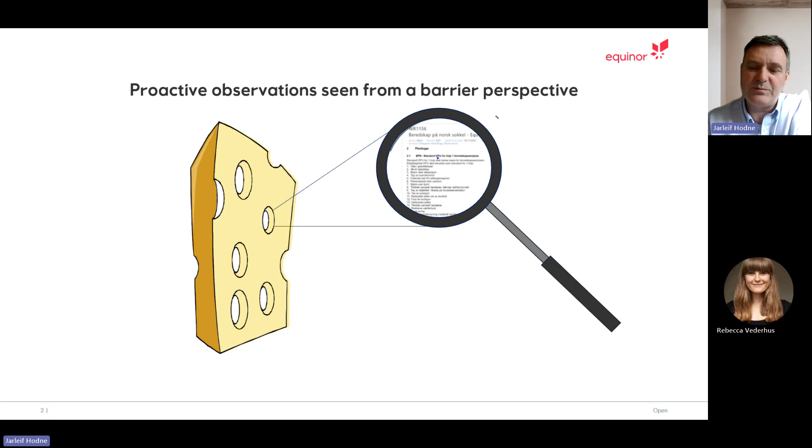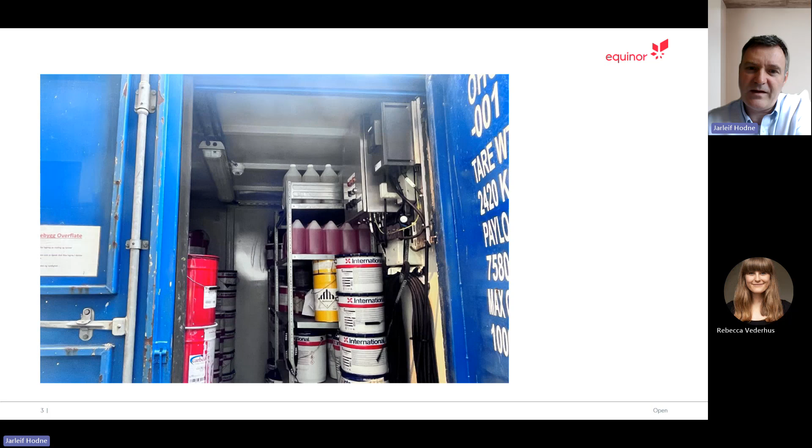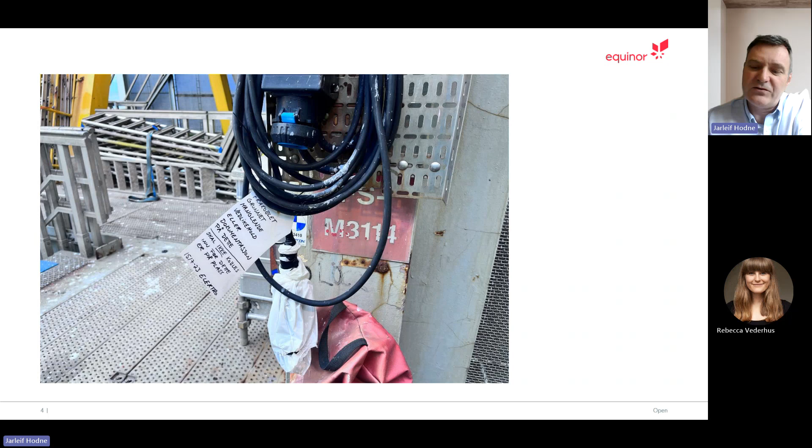Studying the area around, you'll find this: the fire and gas detection for this container has been disconnected, making the observation of an open door just a bit more serious. We have highly flammable liquids stored with the door open, no fire and gas detection. So this represents a small weakness in our barrier.

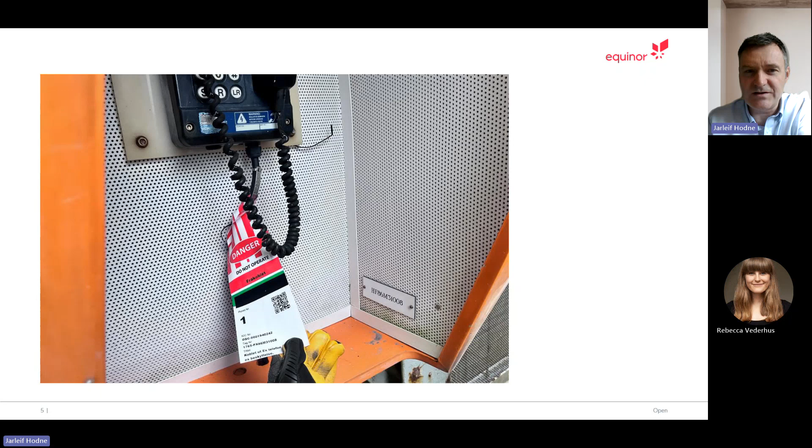If we imagine we did get a fire in the container or the area, we would be dependent on someone observing it and alerting the control room. This is a picture of the nearest phone, out of order, as you see from the note there. And as we all know, the telephone system on an installation is part of our emergency equipment. So this also represents a small weakness in our barrier.

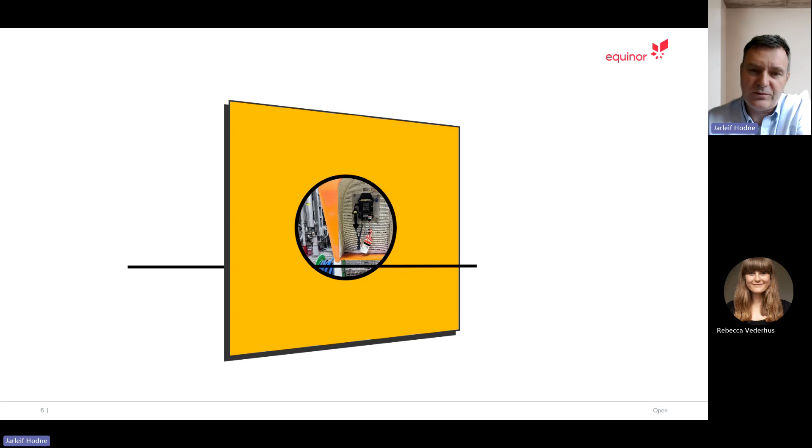Most likely you'd have to move to the next phone, also out of order, also representing a small weakness in our barrier. Moving to the third phone, which by the way works, you'll find it partially blocked.

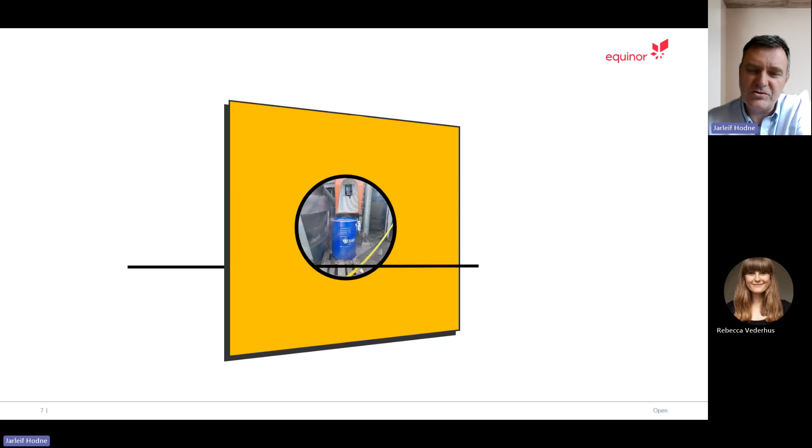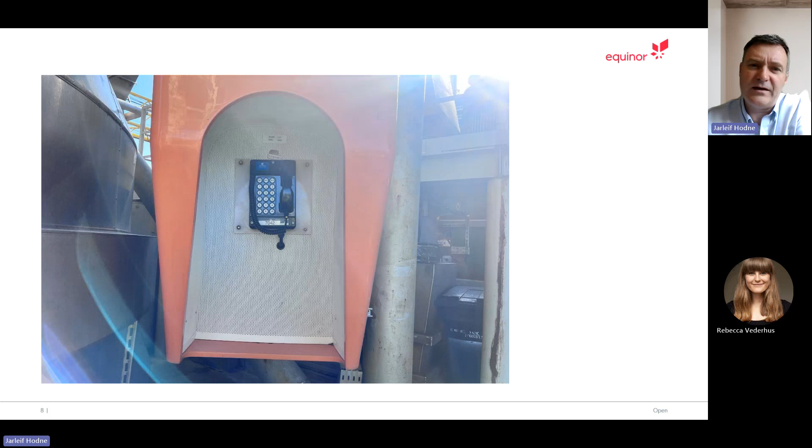There's a hose here, a pallet, an oil drum, and blocking emergency equipment also represents a small weakness in the barrier. When reaching the phone, you'll see there's no sign telling you where it's located, unlike the two other phones that didn't work, which had signs. If the person trying to call the control room was new on the installation, it could be difficult to explain where they're calling from, giving the fire time to escalate, again representing a small weakness in our barrier.

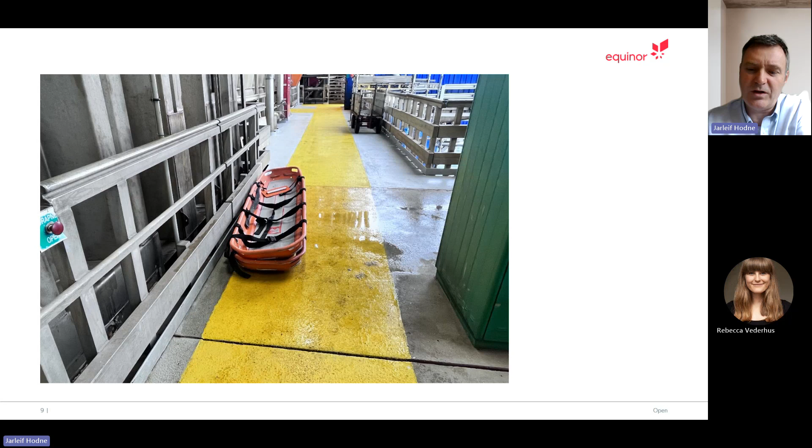These stretchers stored in the gangway - this is not an optimum situation. This is the way emergency personnel would have to pass, and the stretchers give a small hindrance, representing a small weakness in our barrier.

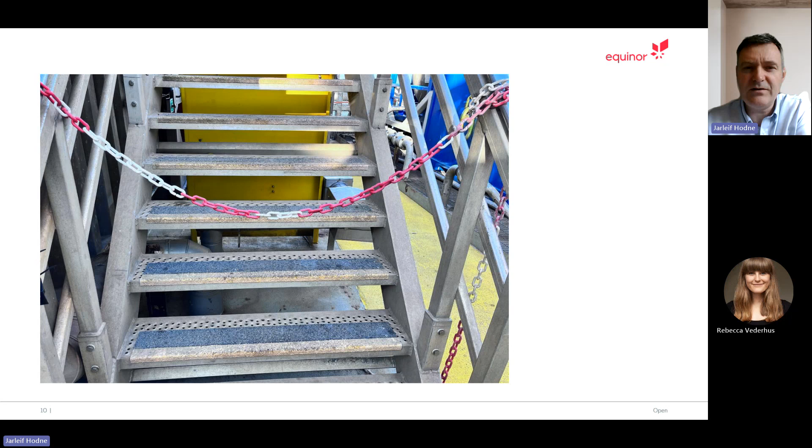When emergency personnel could have chosen different routes to reach the container, this is one of them. The observation is there's no sign on the barriers explaining why this staircase is barriered off. If emergency personnel chose to use these steps, they'd be able to walk up a couple of levels before the remaining staircase was removed completely. No risk in itself, as it was probably barriered off at that level, but the emergency team would lose time returning back down. So a missing sign on a barrier here represents a small weakness in our barriers.

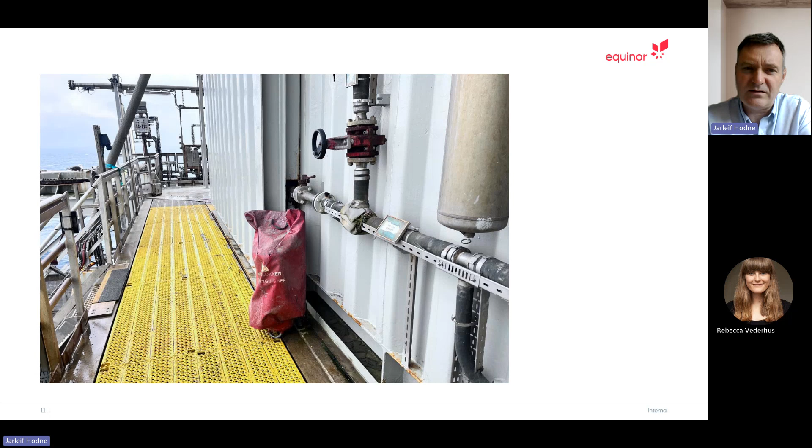This is one of the fire extinguishers close to the container we started with. The observation is there's no sign - the sign is located around the corner and to the right. If someone approached from the opposite direction, it's not a given they'd know the extinguisher had been moved or that they'd look around the corner to find it. So this also represents a small weakness in our barriers system.

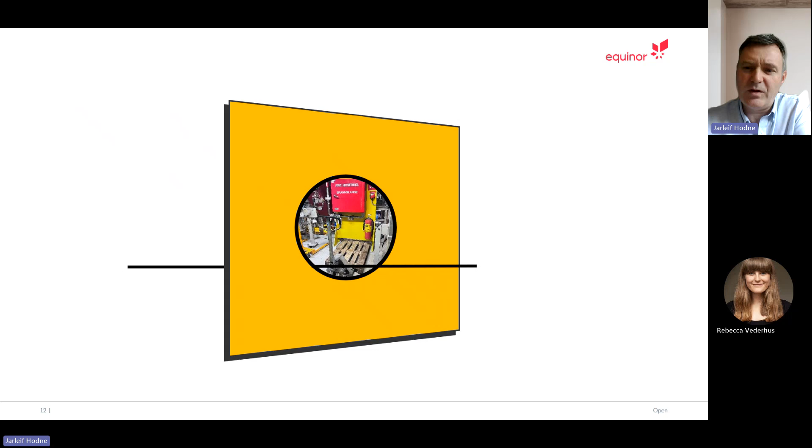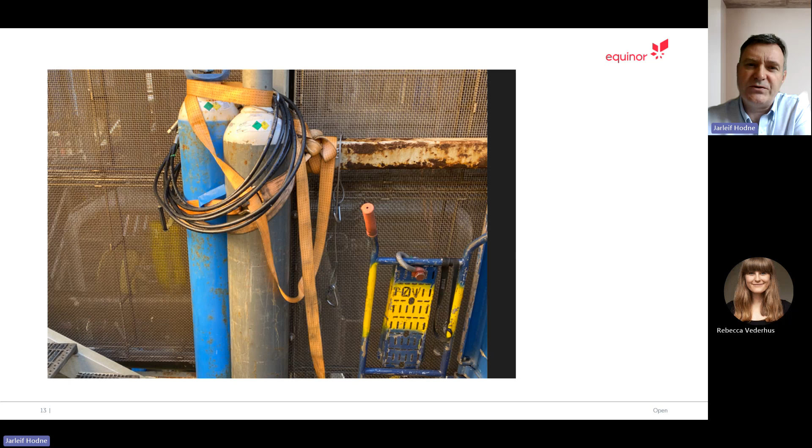On this installation, it was also observed gas cylinders standing upright, secured with fiber straps. If we imagine the fire escalating, this is a situation which could make it even worse. So not securing gas cylinders properly is also a small weakness in our barriers.

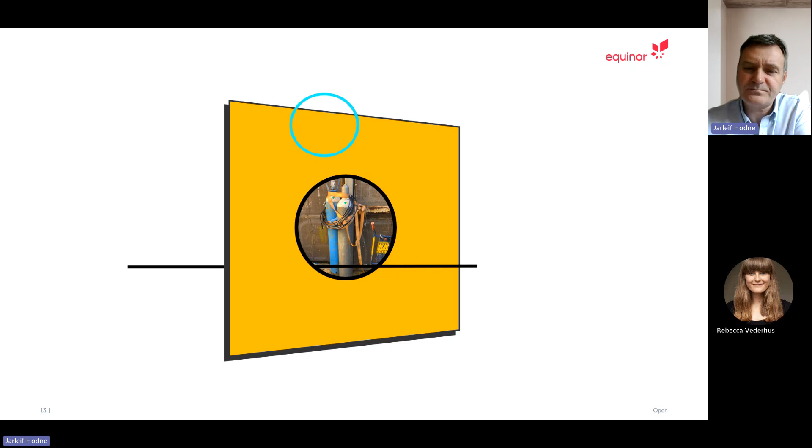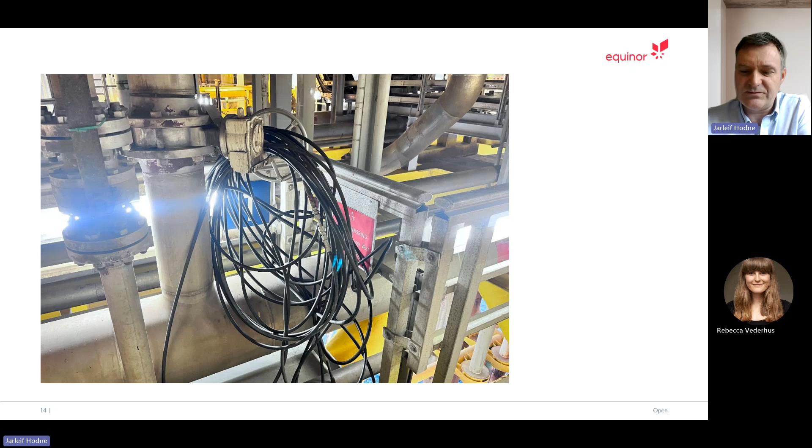This valve is on the main fire water line. Its purpose is to shut off parts of the fire water system if you have a pressure drop or a leak. In other words, it's a quite important valve. Here we have hung off tubing lines on the valve, making it more difficult to access if needed, representing a small weakness in our barriers.

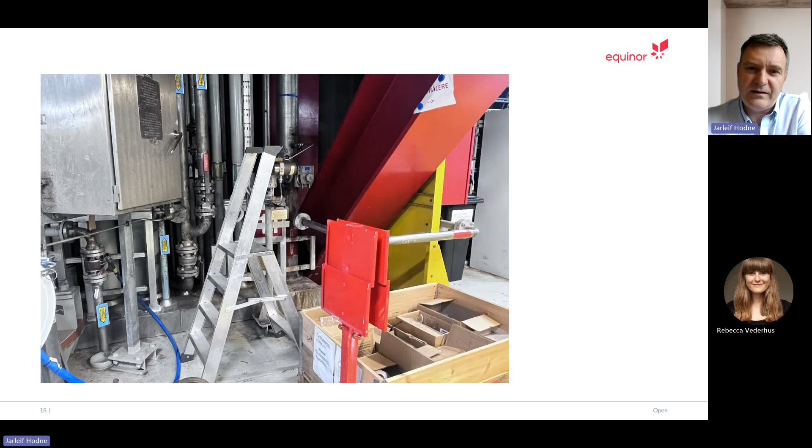In this picture, we have another valve on the fire water lines - a bit difficult to see, but it's back on the wall here. The observation is it's partially blocked by equipment and represents a small weakness in our barrier.

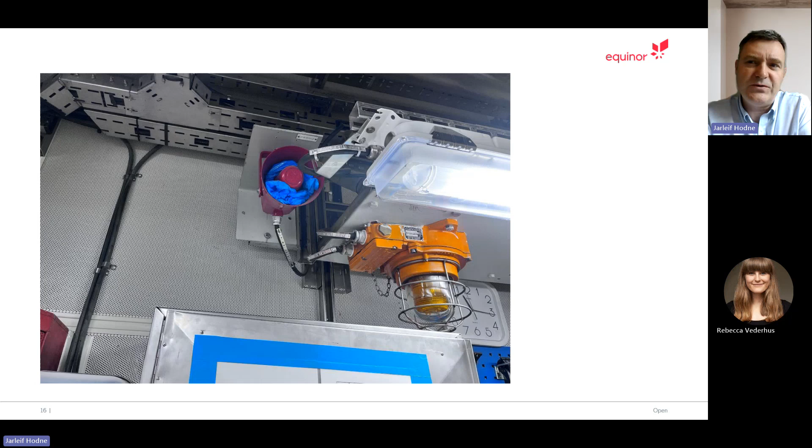This is in an office. There's plastic stuffed in the PA system, which could make it more difficult to hear an important message, and again represents a small weakness in our barriers.

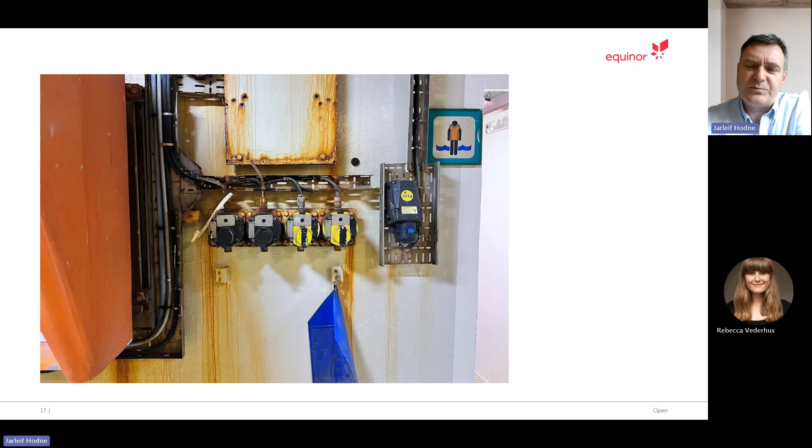This picture is taken from the lifeboat station on this installation. There are two sets of emergency buttons, and the observation is there's no sign. This could create uncertainty about which buttons to press in a situation, again representing a small weakness in our barrier.

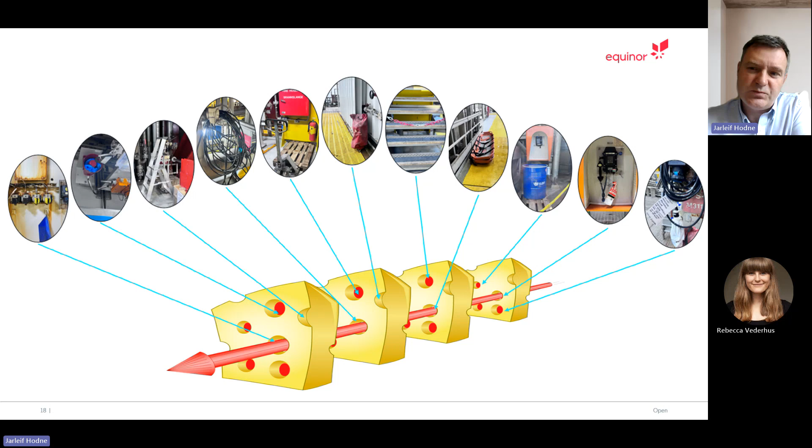The point here is, when looking at these observations one by one, you could easily argue this is just lack of tidiness - there's no big risk, no problem, a lot has to go wrong before this becomes an issue, and so on. But when looking at this from a barrier perspective, knowing they're taken on the same installation within a short time span, this is a good example showing how important it is that everyone participates in proactive observations. One by one, observations will strengthen or maintain our main barriers. So we need everyone to participate.